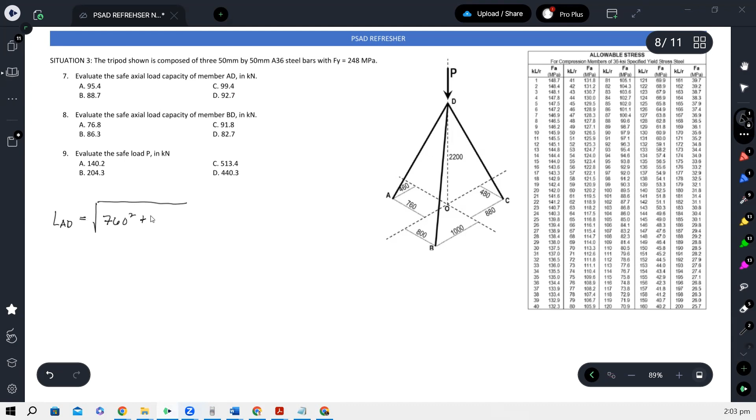So gawin natin. Syempre kung kailangan natin yung length niyan, para makuha yung length niyan, lagay natin length AD. Using the diagram, that's square root of 760 squared plus 460 squared plus yung height 2,200 squared.

Para naman sa length ni BD, square root of 800 squared plus 1,000 squared plus yung height 2,200 squared.

So bali ito yun, ito, tsaka ito. So talagyan natin ng axis. Let's say ito yung x-axis, ito yung y-axis, kasi ito yung z-axis.

At yung length ng CD ay square root ng 880 squared plus 480 squared plus 2,200. Bali ito yung length niya sa Y, ito yung length niya sa X, tapos ito naman yung length niya sa Z nung CD.

No? So inisa-isa lang natin, ha? So we can compute each. Ilagay ko na lang yan sa calculator ko, lalagay ko to sa A, sa B, tsaka sa C.

Okay, so 2,300. Store natin sa A. So MM yan, no? Okay, so lagay natin sa B. And then...

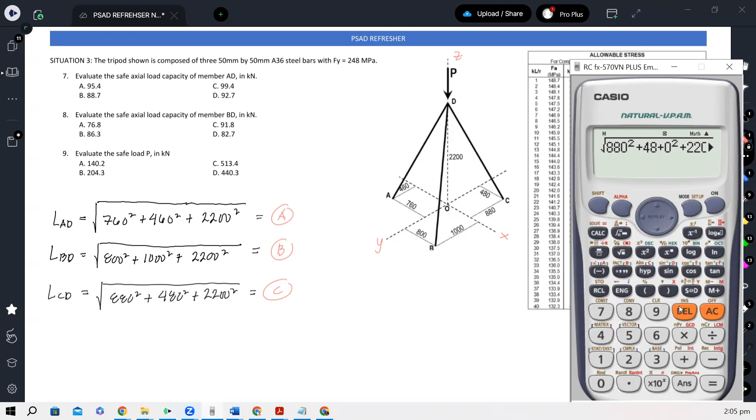Lagay natin sa C. Okay, so at this stage, we are now ready to calculate for the slenderness ratio.

Slenderness ratio ni AD muna, so K, dito, KL AD over R AD. Pero sabi kasi dito, pare-parehas lang sila ng section eh, square section lang, 50 by 50. So ibig sabihin, yung area niyan 50 squared. Yung moment of inertia niyan at either axis is 50 to the fourth over 12. So ibig sabihin yung R ay square root of I over A.

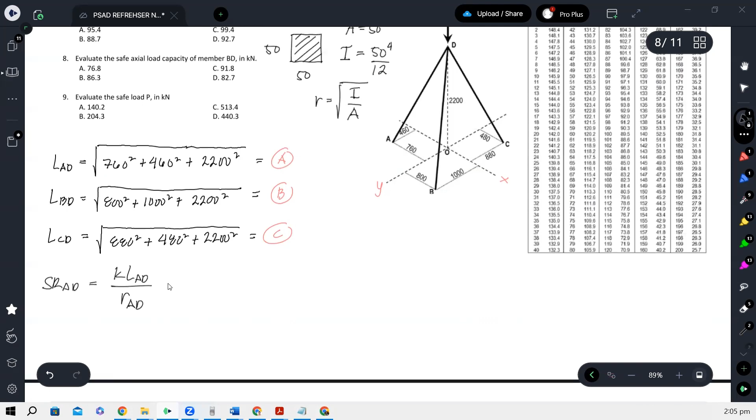Okay? So yung K naman, wala naman kasing masyadong sinabi, so it's safe to assume na yung K nila 1 lahat. Kumbaga parang pin lang to lahat, pin dito, pin dito. Okay? So K is equal to 1.

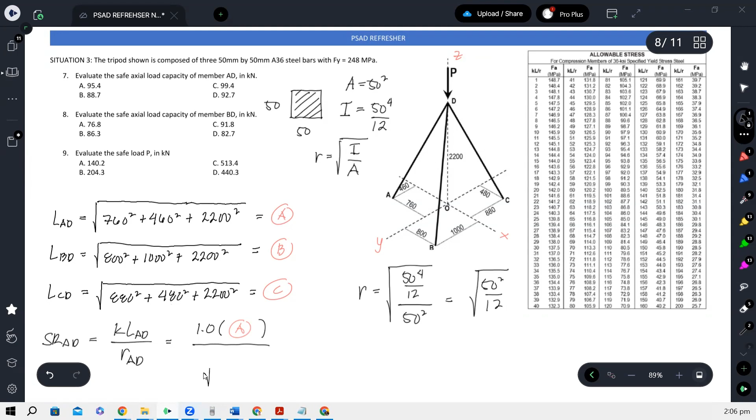So 1 times yung length ni AD na nasa A, over, simplify nga natin to. Square root ng 50 to the fourth over 12 over 50 squared. So magiging ano na lang siya, square root ng 50 squared over 12. Okay?

At kumpitin na rin natin para isang pasada na lang, yung para kay BD. So ganun pa rin, 1.0 over, same lang yung cross-section. And then yung para naman kay CD.

Okay, so unahin natin si AD. A over square root of 50 squared over 12. 164.378.

Okay, so tingin tayo sa table. Nasaan yan? 164 na slenderness ratio. Somewhere dito. Ito. Diyan, no? So mag-interpolate tayo dito.

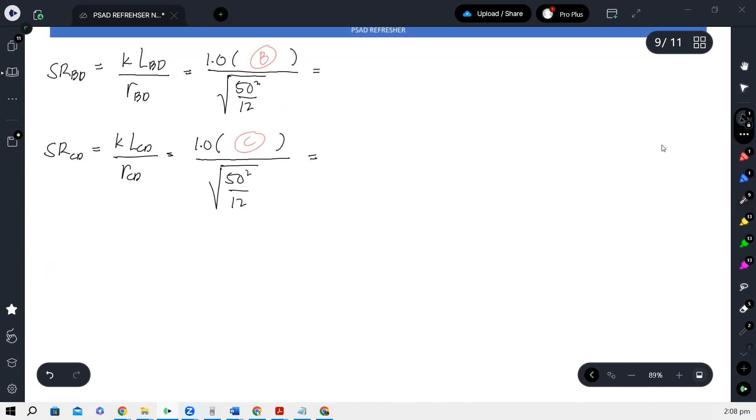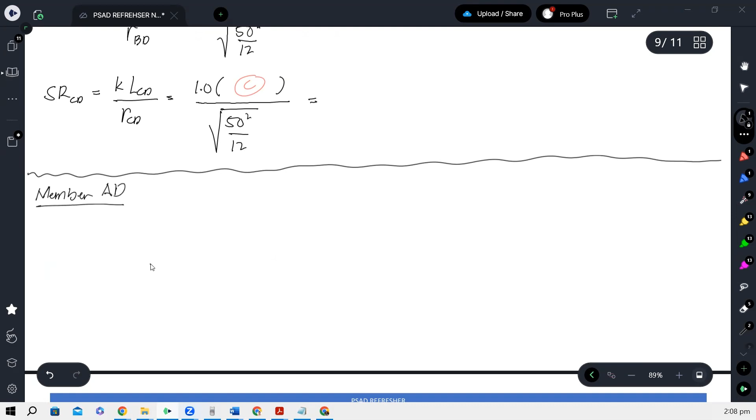Okay, so dahil yung slenderness ratio niya 164.378, so we will apply interpolation. So ito yung slenderness ratio, ito yung FA. So 165 minus 164.378 over 165 minus 164 equals 37.9 minus FA over 37.9 minus 38.3. So from here, we can solve for the allowable stress ni AD.

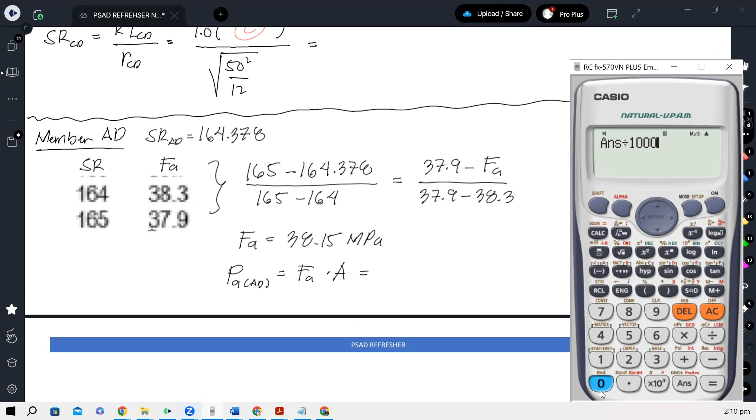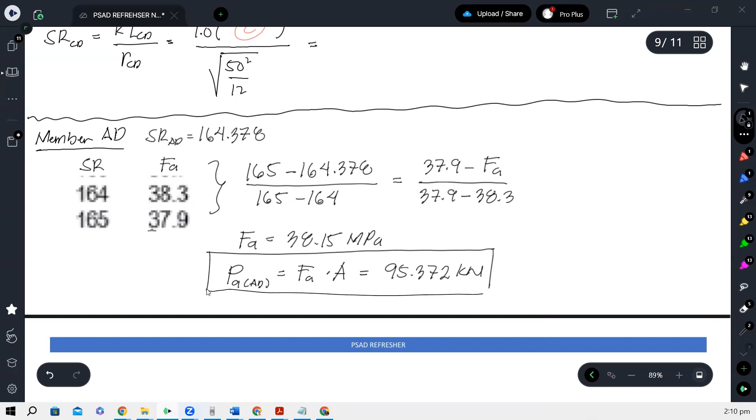So that's 38.15 megapascals. So therefore, yung allowable load ni AD ay equal sa stress times area. Okay, and that would be, multiply lang natin ito ng area na 50 squared. So this will be in Newton, divide natin ng 1,000 para maging kilonewton. So 95.372 kilonewtons. So sa choices, that's 95.4.

Okay, next, we will just repeat the process for BD. So kay BD naman tayo, so tuloy kunin naman natin itong slenderness ratio ni BD. Okay, ayan. 176.363. So saan yan dito? 176. So dito banda. Ito.

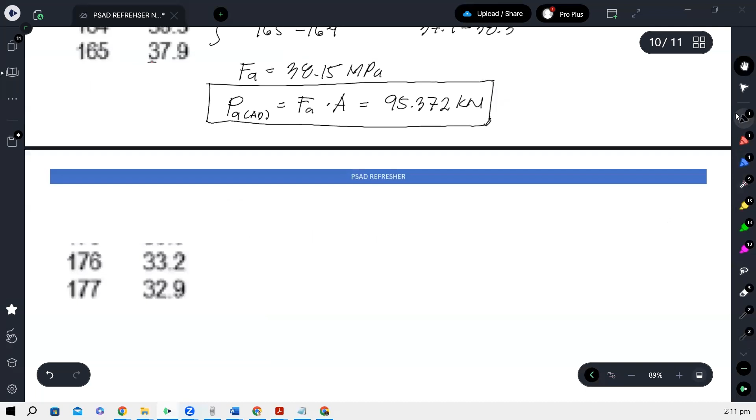Okay, member BD. For member BD, the slenderness ratio we computed is 176.363. So once again, using interpolation, we have 177 minus 176.363 over 177 minus 176 equals 32.9 minus FA over 32.9 minus 33.2. So therefore FA here would be 33.09. And then our PA for BD would be, same as before, FA times area divided by 1,000. So that's 82.728 kilonewtons.

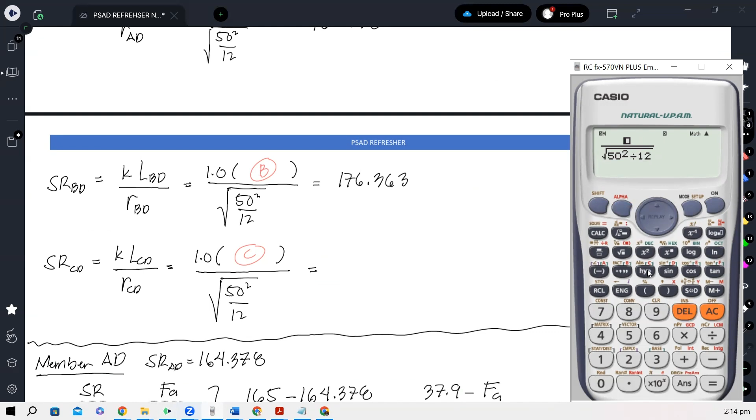So next, evaluate the safe load P. But before that, let's compute CD, the capacity of CD. So let's get the slenderness ratio again. So it's 167.496.

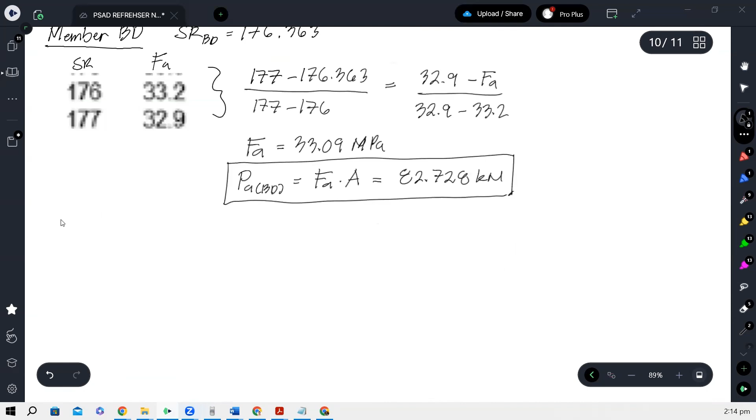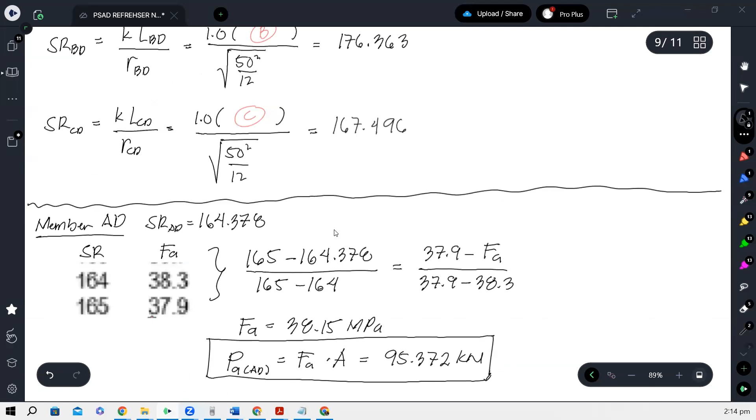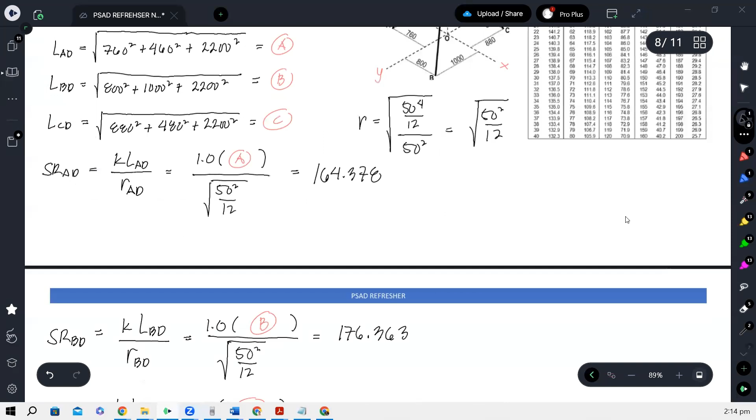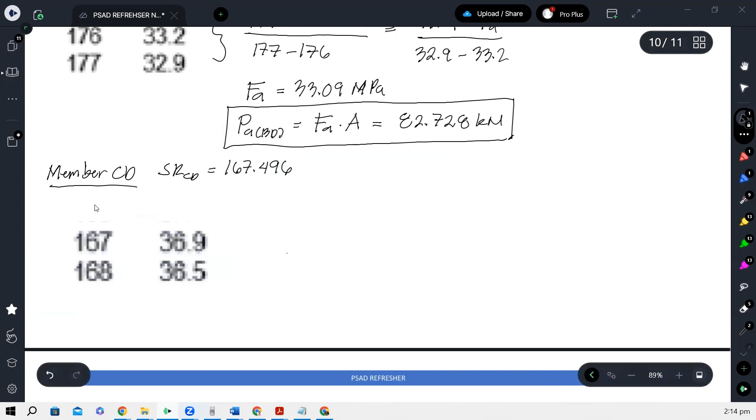And then let's compute for member CD. Slenderness ratio was 167.496. Okay, so where is that? It's between 167 and 168. So by interpolation again...

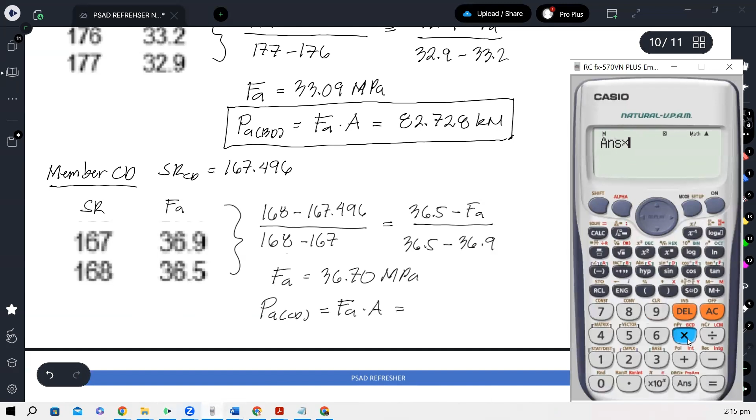So 36.701 megapascals. So our PA for CD would be 91.753 kilonewtons.

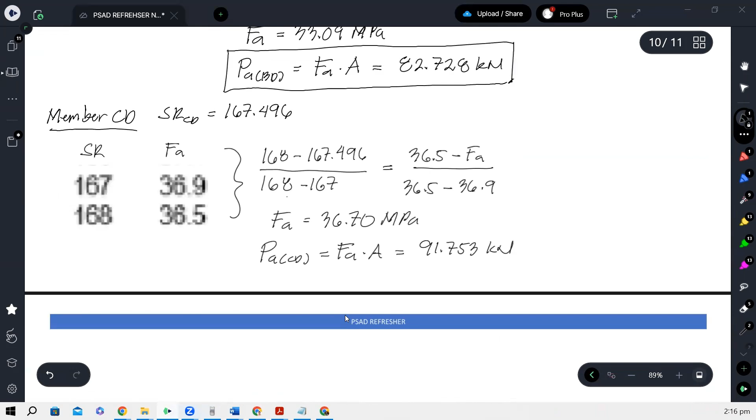Okay, although that's not exactly the question, right? So now that we've calculated all of the allowable forces, the question is, what is the allowable P, the P to be applied? How can we compute that? Of course we need to do structural analysis here. We will solve for the member forces on AD, BD, and CD, then relate it to force P.

Okay, so as we can see, this is just a concurrent system, except it's 3D. So we need to get the components of these forces AD, BD, and CD. Let's do it. We know that they're all compression. So this is how the force looks.

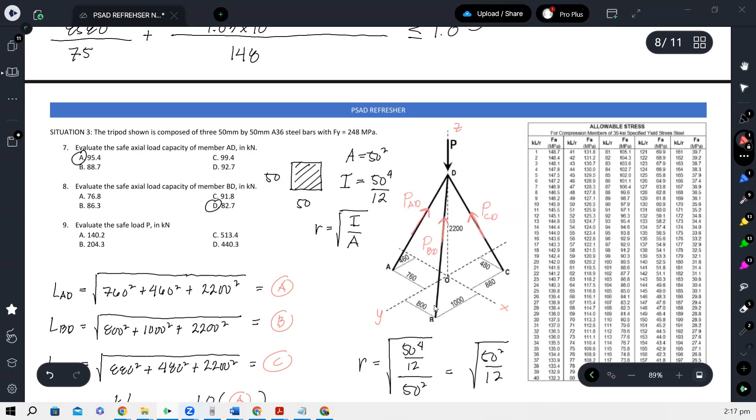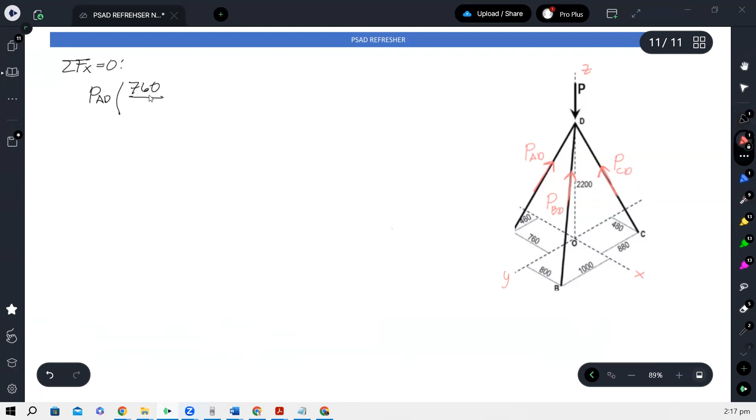Okay, let's take summation of forces along x equals 0. Along x, PAD has an x component, and that would be this measurement, 760, over the length AD, at point A. So it goes to the right since it's compression, toward the positive x-axis.

And then PBD, its x component is 800 over the length. But this time, if you notice, it goes to the opposite side of x, so it's negative.

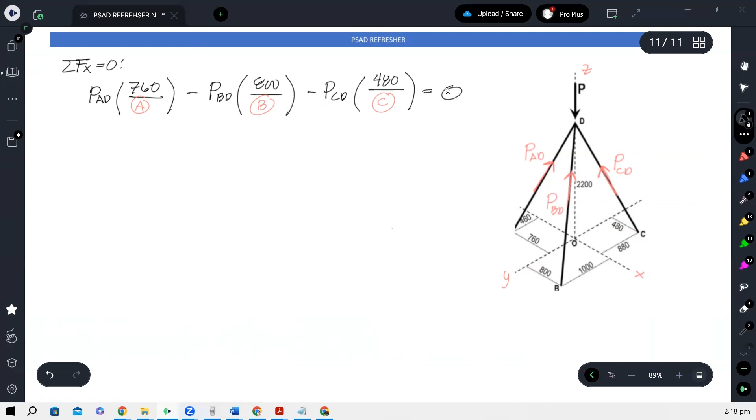Okay, and then PCD, its x component is 480 over the length. And again, if you look, it goes that way too, so negative. And there's nothing else, so all equal to 0. This will serve as our equation number 1.

So now let's take summation of forces y equals 0. Once again, PAD — its y component, isn't this the y? — is 460 over the length. And if you notice, AD goes that way, opposite of our positive y, so negative.

Okay, next, PBD. The y component is 1,000 over B, and it also goes to the back of y, so negative. Okay, and then PCD, we have 880 over C, and it goes toward the positive y direction, so plus.

So that's equation 2. We can create one more if we take summation of forces Z equals 0. PAD's Z component is 2,200 over its length, and it goes upward — actually all of them go upward, so positive. Plus PBD, also 2,200. Plus PCD, 2,200. And then the downward P is minus, so equal to 0.

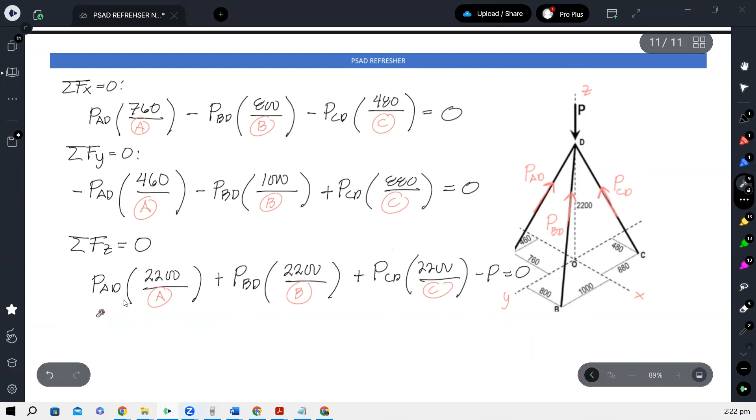And we can check that by assuming — let's just assume, for example, that this one fails first. So when this fails, we substitute its allowable or maximum load here, and then we will attempt to solve for the other forces.

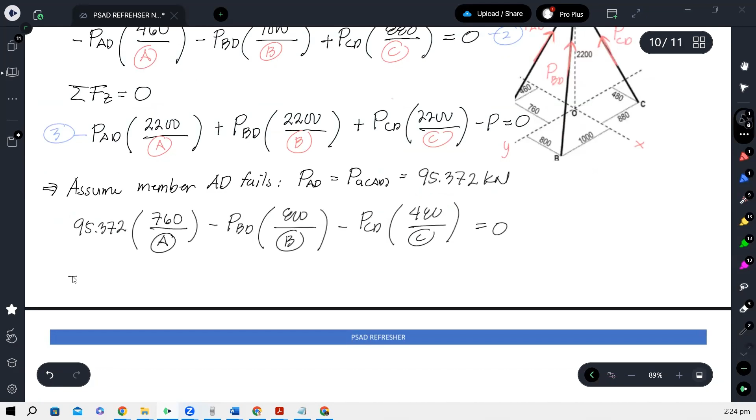Equal 0. And then yung second equation, gamitin din natin ito. Okay, so here we have two equations and two unknowns. So we can solve this simultaneously. So let's solve for PBD and PCD.

Ito tayo sa calculator. Two equations. Dito nilagay si PBD. Take note na ita-transpose natin ito sa kabilang side, di ba? So magiging positive to, ito rin magiging positive. So we only have 800 over B, tapos 480 over C. And then ito nasa kabilang side, so 95.372 times 760 over A.

Okay, equation 1, equation 2. So once again, tatranspose natin sa kabilang side. So magiging positive, 1,000 over B. Ito naman magiging negative. Okay, let's keep this negative kasi ito yung dalawa yung nilipat natin. Ito as is.

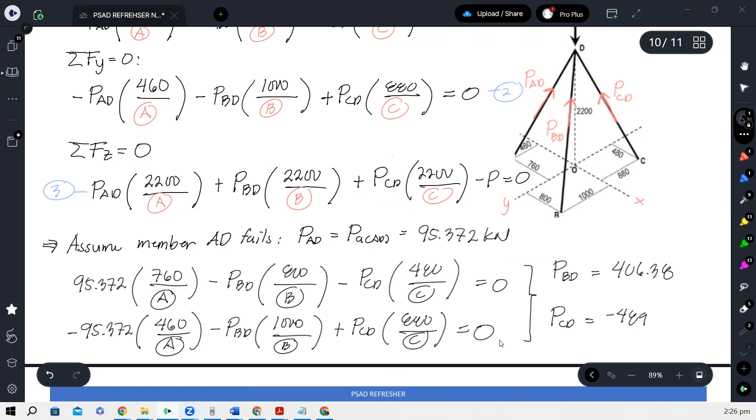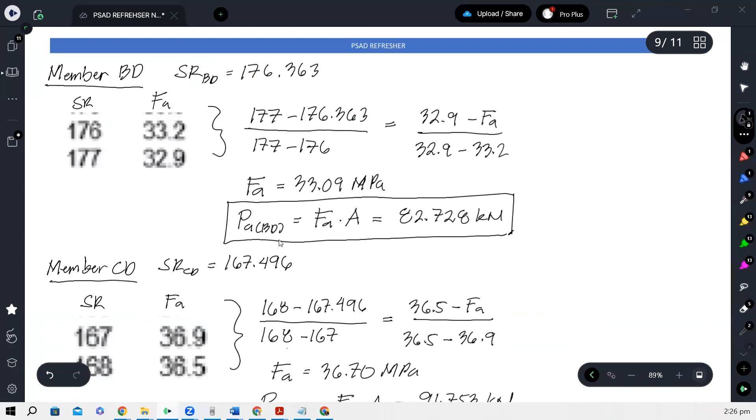Okay, so pansinin niyo na kapag kinompare natin yan dun sa allowable stress ni BD 82, so lagpas na siya. So ibig sabihin hindi to pwedeng mangyari. Ganon din to, lagpas na sa allowable ng CD. So ibig sabihin, this is the wrong assumption. Therefore, wrong assumption.

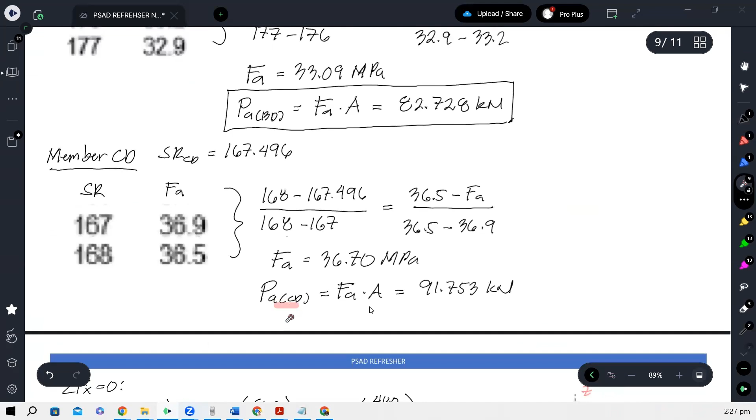Okay, so ibig sabihin hindi yung AD yung unang mag-fail. Okay, hindi AD ang unang mag-fail. So ano yung unang mag-fail? So pwedeng itong BD, pwedeng itong CD. So gawin ko CD naman. What if CD yung unang mag-fail?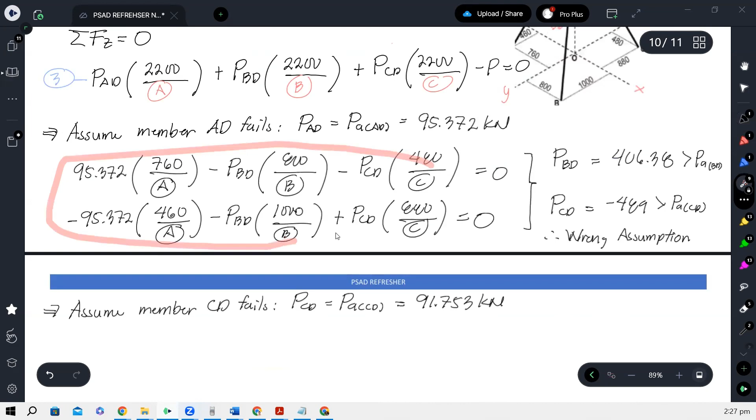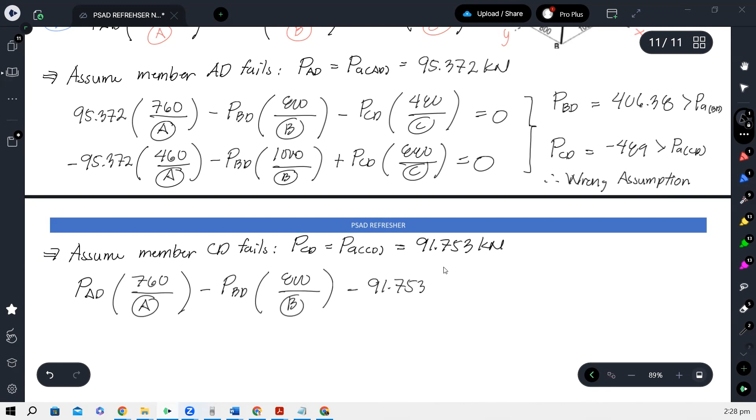So yung PCD, equate natin sa allowable niya, which is 91.753. And ganun pa rin, gagamitin natin to, equations na to, but this time, etong CD naman yung papalitan natin. Sorry, PAB na to. Sorry, PAD pala. And then yung CD natin, 91.753 equals 0. And then PAD, negative, minus or plus 91.753.

Ayan, okay? So once again, let's solve for PBD and PCD. Sorry, PAD tsaka PBD. So iba naman yung isi-solve natin. So double check ko lang yung value. Ay, napalitan ata yung B natin. Tama pala. Tapos ito yung C, no? Okay, so dito we have 760 over A.

And then we have 800 over B. And then ito, dilipat natin sa kabilang side, magiging positive. Okay? And then we have here negative 460 over A, negative 1,000 over B. And 91, itong 91, lilipat natin sa kabila, magiging negative din, 91.753 times 480 over C. Okay, so lumabas 22 tsaka 35.

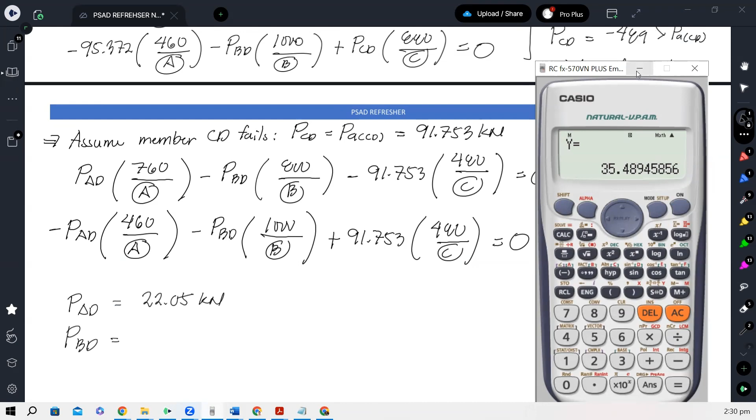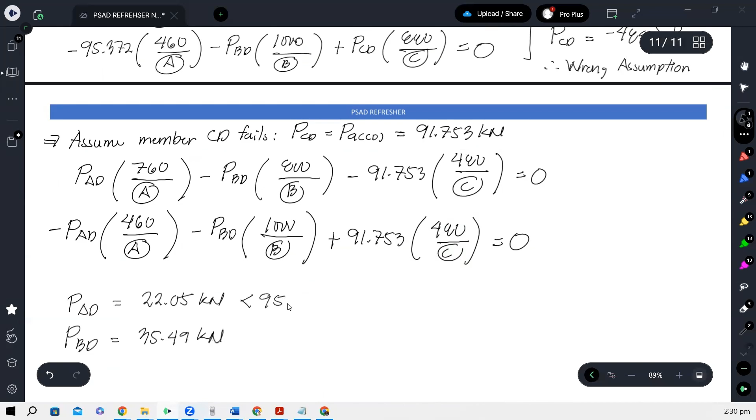So ito yung PAD, 22. Tapos yung BD naman ay 35.49. Okay? So ngayon dahil lahat sila, yung allowable natin dito, 95.372, so hindi naman siya lumagpas. Tapos ito namang BD, ang allowable ay 82.728, so mas maliit pa rin, kilonewton. So therefore, correct assumption na kung saan ang una pa lang mag-fail si CD.

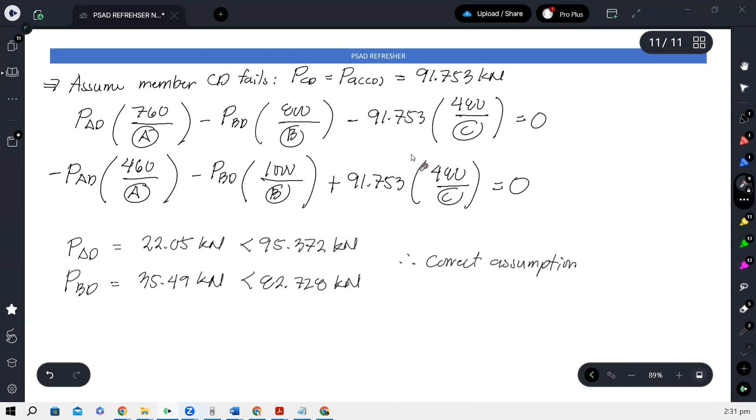Siya yung una mag-fail. So ito yung PCD, ito yung PAD, ito yung PBD. So ngayon, yan yung maximum condition na pwedeng mangyari. So we can now use equation 3 para ma-solve yung allowable P. Okay? Equation 3 nasan? Ito.

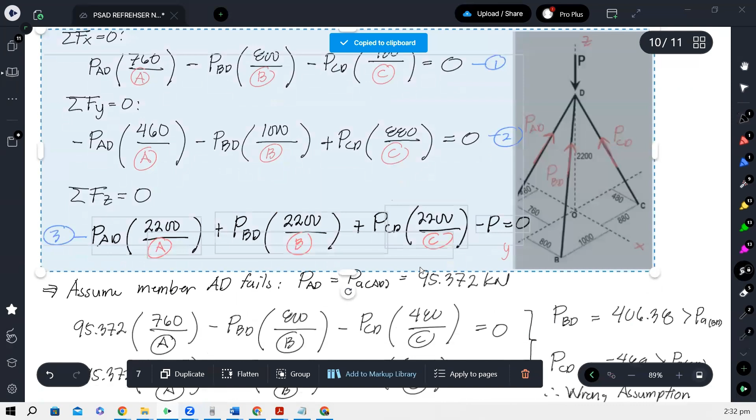So basically, P equals this. Okay, so substitute ko na lang diretso ha. So yung PAD natin, 22.05 times 2,200 over A plus yung PBD, 35.49 times 2,200 over B plus yung PCD natin is yung 91 over C. Okay, so 134.61.

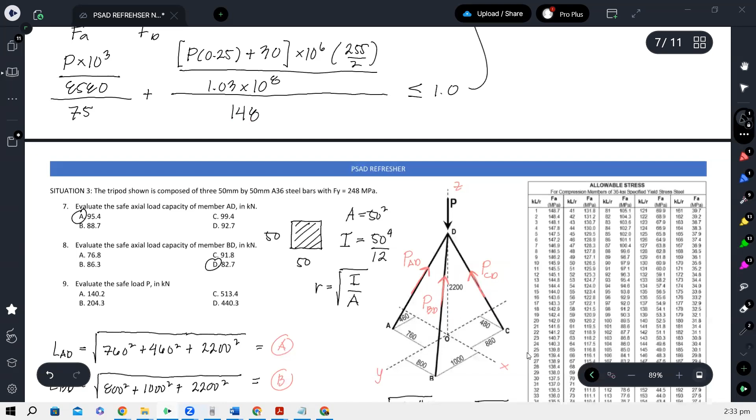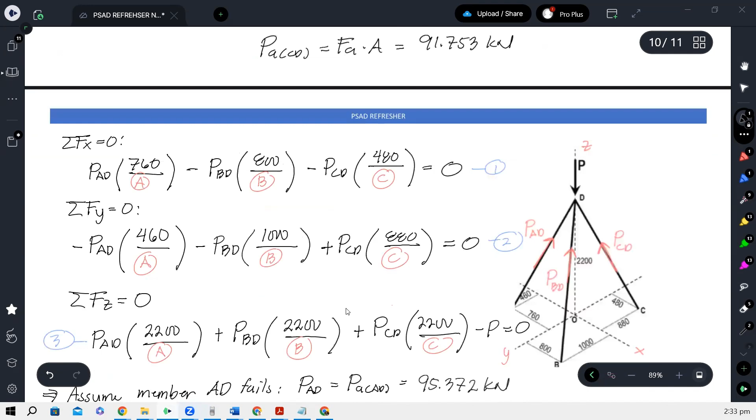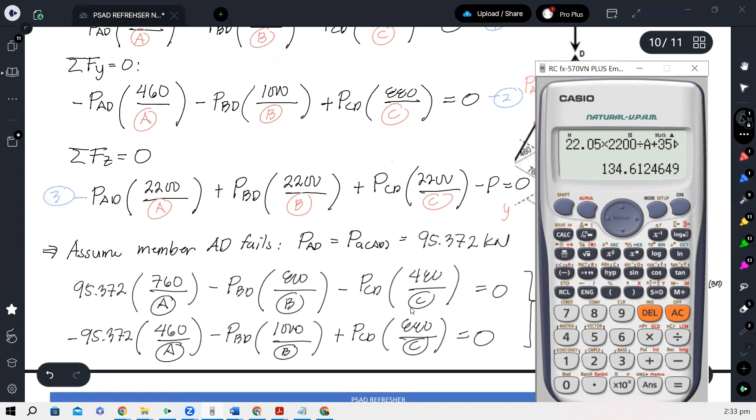Okay, so ba't wala? Double check. So double checking the equations ha. PAD sa X, so to the right positive. PBD 800 to the left negative. PCD 480 to the left negative. Summation of forces sa Y, PAD papunta doon so negative 460, tama. PBD papunta rin doon so 1,000 over B negative, tama. Then PCD ito 880, so tama rin, positive. Equation 3, so tama naman to lahat.

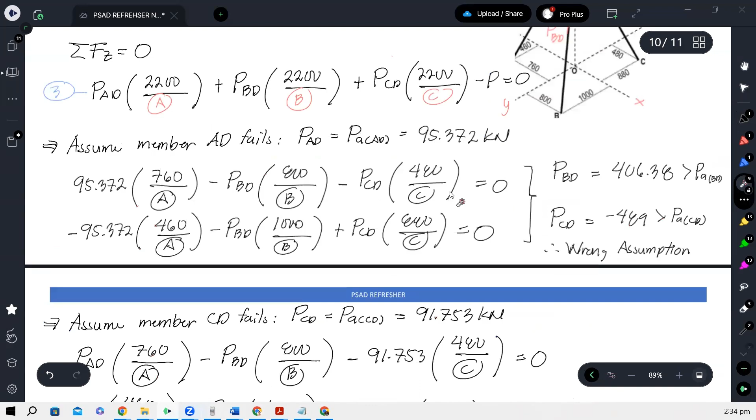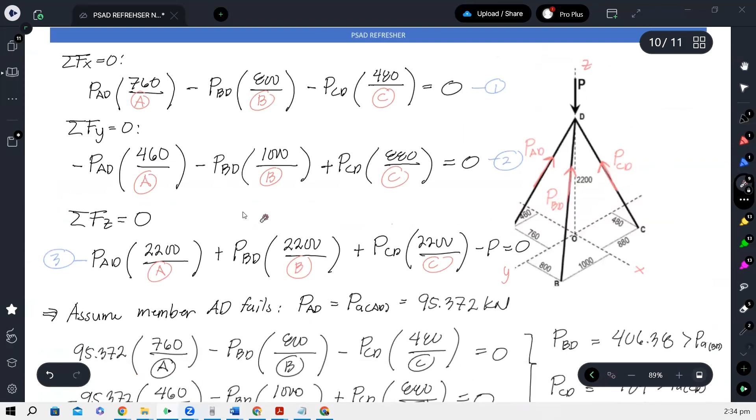Nung nag-solve tayo, let me just check yung mga sign. This is positive, negative, negative. So negative, negative. And then sa equation to this, negative, negative, positive. Negative, negative, positive. Ayun, nakita ko na. Ito, hindi ito 480, dapat 880. Okay, so mag-iiba to.

Mode equation 1. Okay, so 94.515. Okay pa din, no? Muntik na. 94.515, so mas mababa pa rin sa 95. Tapos yung isa, 38.37. Okay pa rin, so tama pa rin yung assumption natin.

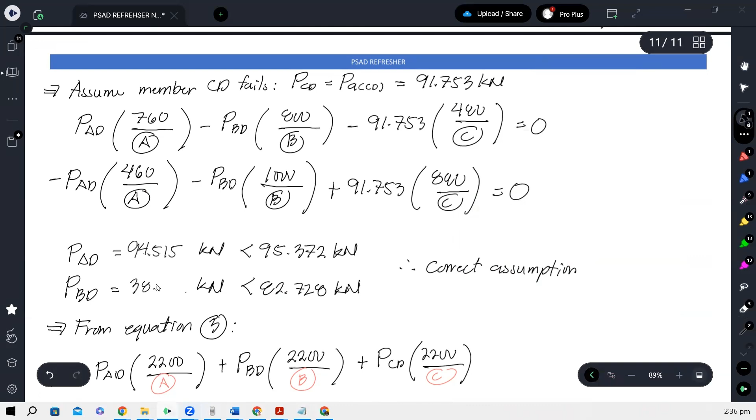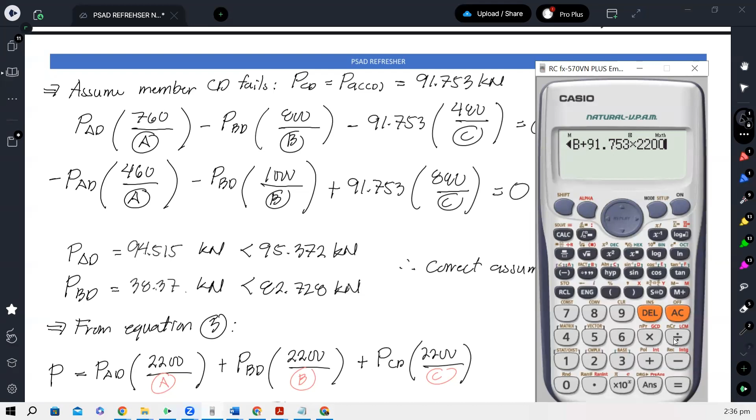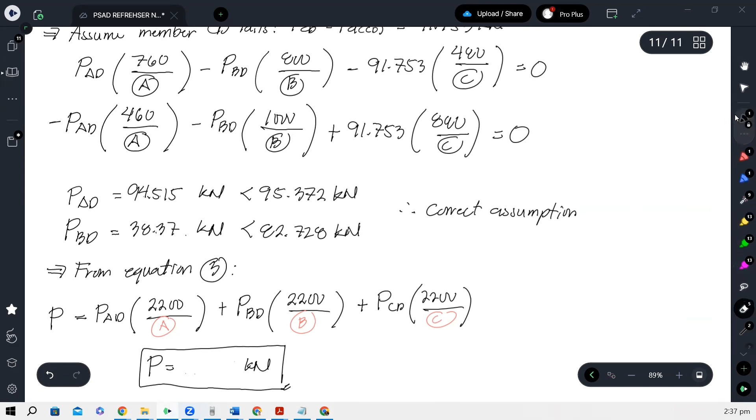So, using those, 94.515 times 2,200 over A plus yung PBD 38.37 times 2,200 over B plus 91.753 times 2,200 over C. Okay, so dapat 204.3. Okay, so from the choices, that's letter B.